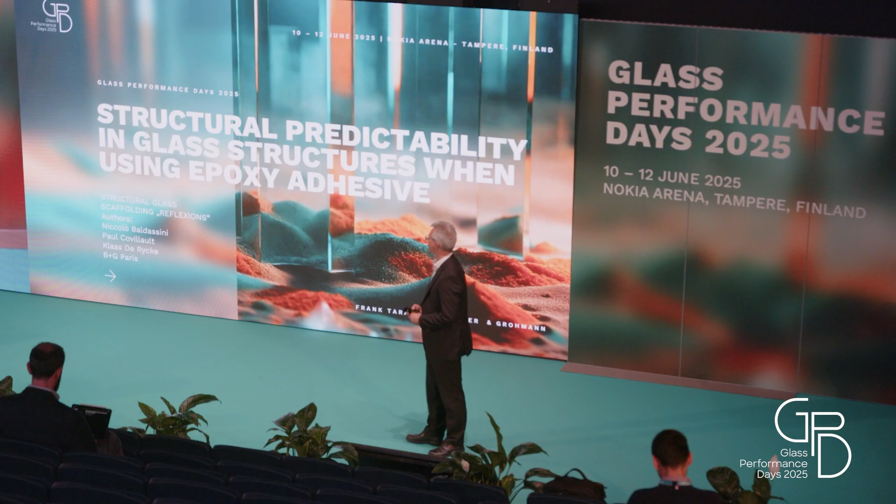And the authors of the paper are my Paris colleagues, Nicolo, Paul, and Klaas. And unfortunately, or fortunately, I must say, they cannot be here, but asked me to present the project to you. So it's my first time being here at GPD, and I've never been on such a huge stage, so we'll see how it works. There are a lot of empty spaces yet, but I'll do my best.

So here it is in all its beauty. We have been asked by an artist, Emmanuel Barrois, who came up with the idea to do a scaffolding with glass elements. And the idea is that it's a modular system that can be put together, dismantled, put together again at a different place, and obviously it's a piece of art.

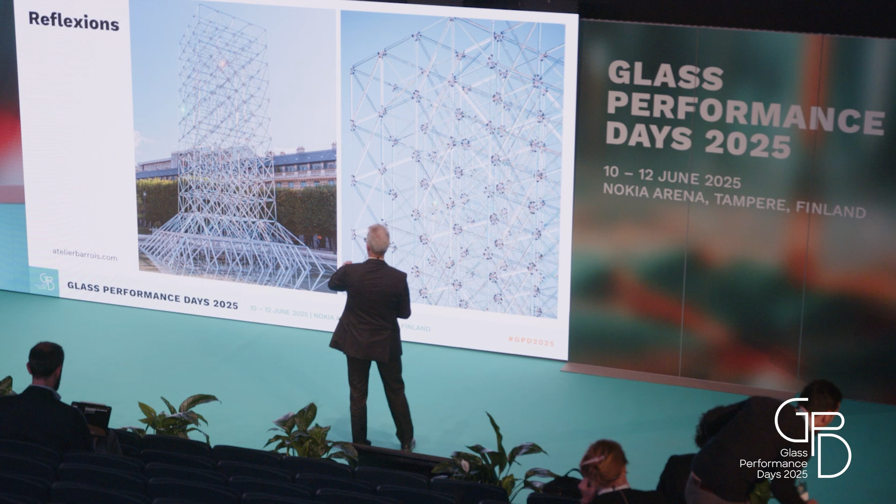It's not a structural scaffolding, but it's a nice study on how to solve the different problems that are involved with the detailing, and also on a global level, how to deal with the predictability and also with the brittleness of glass. So in these first two impressions, you see at the bottom there's a steel base, and up from there it's all glass.

And there were many studies done on the layout, on the configurations of the diagonals, maybe have some fancy shape, but the decision was taken, okay, we should stay very clearly in a pattern that everybody is familiar with in a scaffolding. And so there were also a lot of studies done on how to do the diagonals, in which configuration. And we ended up with this chevron shape.

So if you're familiar with structural engineering, you would say, okay, why are there so many? We could only have one diagonal in every plane and every level. That would be sufficient. But of course, then the artist said, that's a little bit too little, we need more. We need more diagonal bars. And that's where the dilemma starts.

Having more than one diagonal in every level means that it's structurally indeterminate. So it's sensitive to movements. You never know, okay, where does the force go? How big is the force in the individual member? So that's the key thing that we had to obey here, how to do this project.

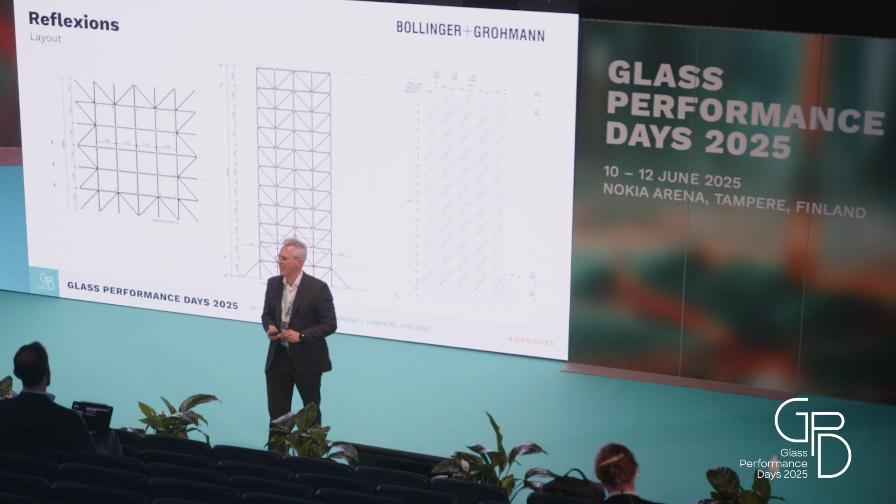What you'll also see, there are no diagonals in plan view. There's no spatial diagonals in these cubes. The cubes, by the way, are based on a 115 by 115 grid. So the whole thing is 460 by 460 in this upper part, and then spreading out to 6.90 meters at the bottom. Overall, the glass part is 12.65 meters high, which is supposedly the biggest glass scaffolding structure ever built.

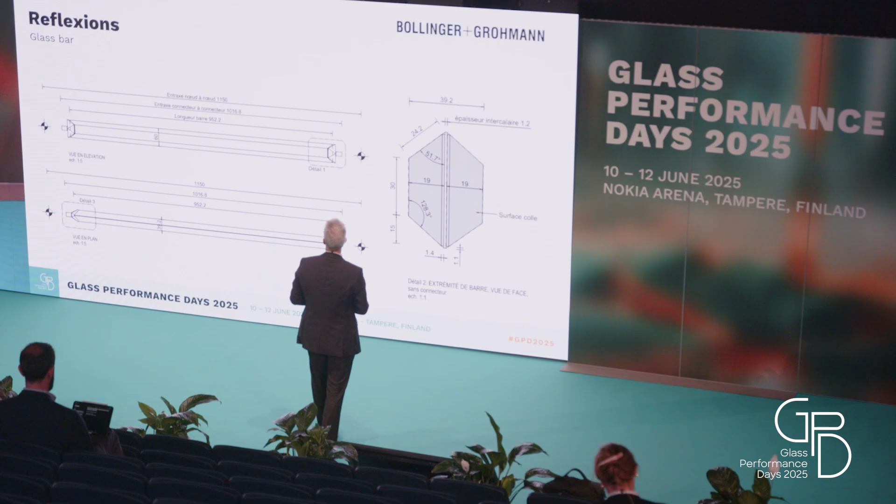So this is the bar itself, based on the 115 module, and it's comprised of two layers of 19 millimeter annealed glass. Except for some bars, they consist of toughened glass. The long diagonals at the bottom, and some with the highest forces of the verticals at the bottom are also toughened. And it's laminated with EVA. And of course, the end connection is the part where the gluing takes place.

So a lot of conceptual studies were done on how to do the nodes. And I've seen a lot of them. I only picked 4 out of these conceptual studies. The boldest one on the top, that would have been quite a challenge in my opinion, because this was considered to be all glass. So what you see there was considered to do this in glass as well, and bolt it somehow together, or glue. You can see that picture with the glue. So that would have been quite a challenge, and it was abandoned.

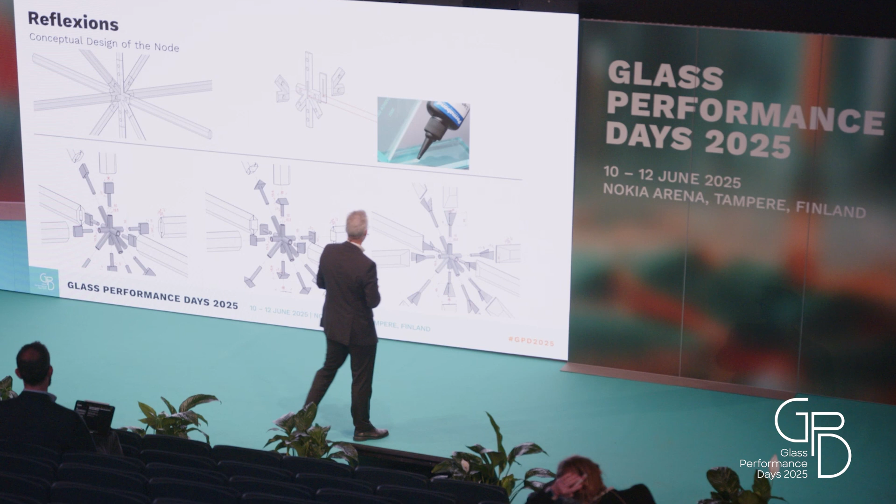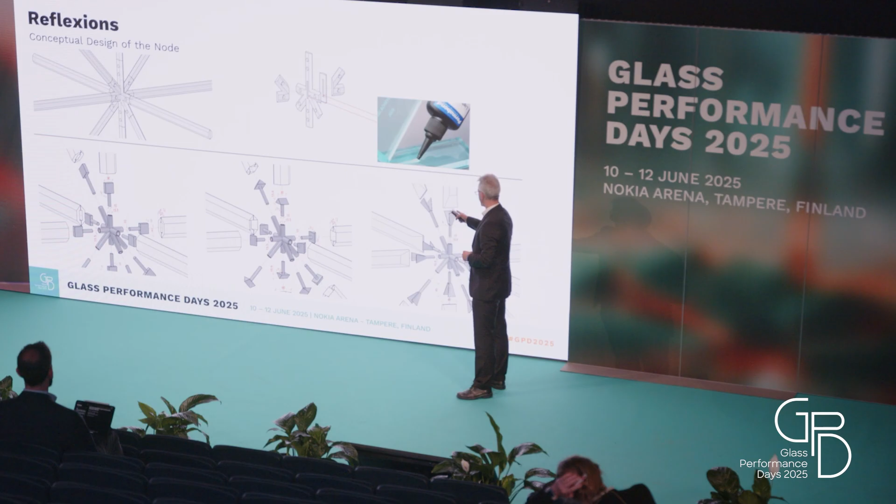And then we stayed a little bit more conventional. At the bottom, you can see the three different configurations on how to do the interface between the node and the actual glass prism. And we ended up with something similar to that. That's a pre-study still, but with a glued connection of this adapter to the end of the glass.

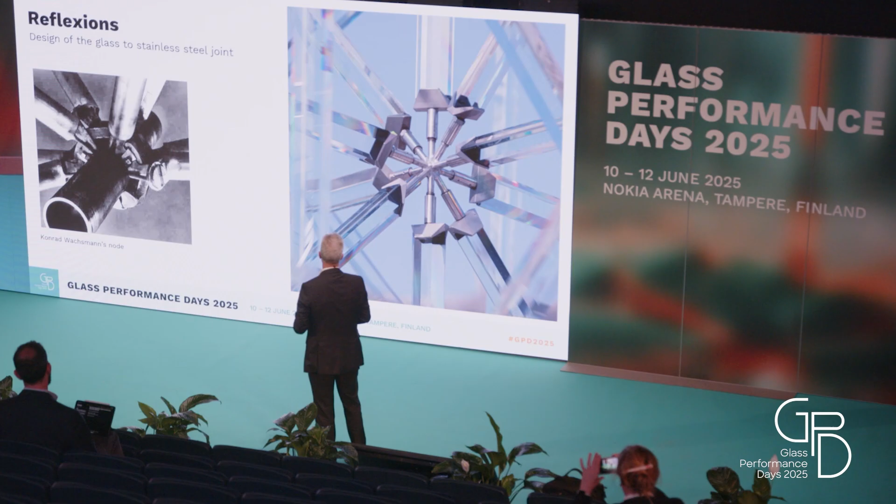And so this resembles somehow what you're all familiar with, this Wachsmann node or the Mero system where you bring all the bars together. The difference is that we don't have this ball and you cannot screw whatever configuration into it, but it's all predefined due to the geometry and the location in the system. And on the right-hand picture, you can already see the stainless steel interface, this adapter, and the sleeve with the thread, and this laser welded node.

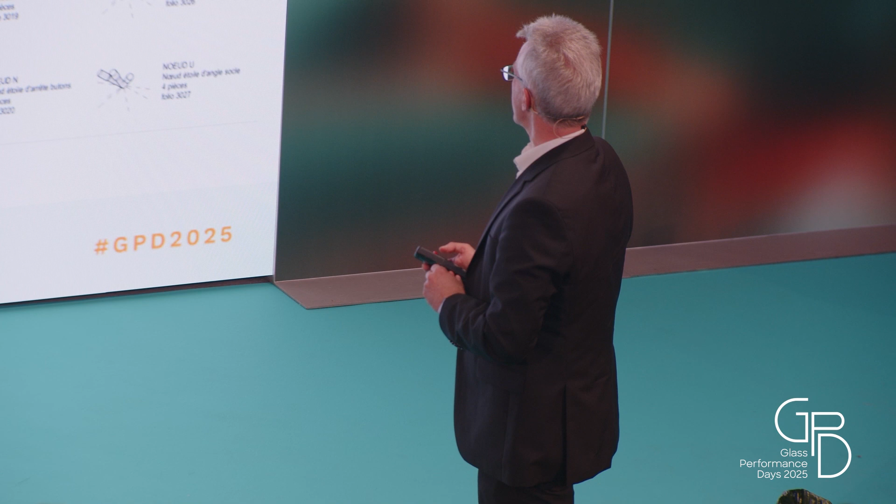So a little bit more in detail, on the right-hand side, you can see all the different configurations in these different colors that we had to provide. There's a M14 thread, there's the sleeve, and there's the counterpart on the node. As I said, laser welded. The shape of the angle, that was determined, by the way, by Emmanuel Barrois, the practice. They did all the glass assembly, they did also the lamination and also the gluing in their own shop.

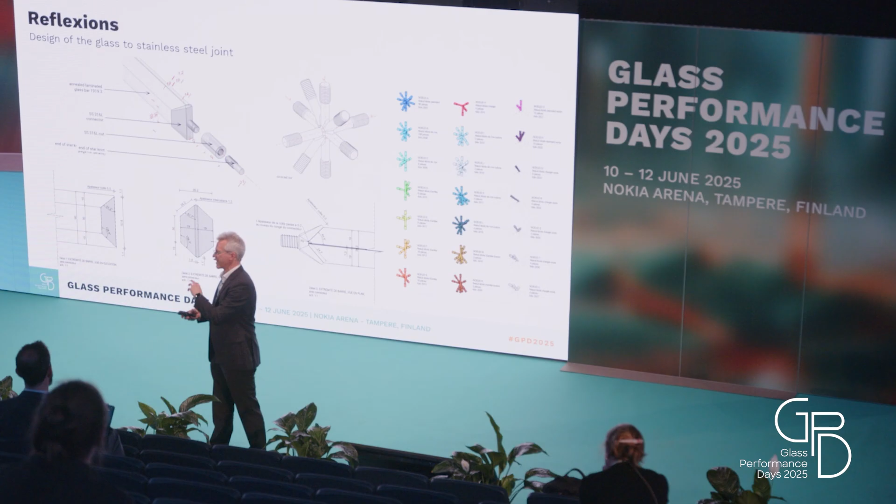And in the beginning, it was considered that we only have a 0.3 millimeter gap for the epoxy. Later on, that was changed to 0.6 millimeters due to the tolerances that are there. So 0.3 is really tiny. And there's one special thing: all of the threads in the horizontal and vertical bars are right-handed and right-handed. There's no left and right-hand thread. Only the diagonals have left hand, but only on one end, and the right hand on the other end. I'll get back to that later.

So of course, we had to do all the structural analysis, come up with the relevant loading, which is obviously wind loading, because there's no people climbing it, hopefully. By the way, it is placed in a water basin, so that prevents, hopefully, people from climbing. And what you can see here at the bottom, again, in this different color, that's the steel part, and above it's the glass part.

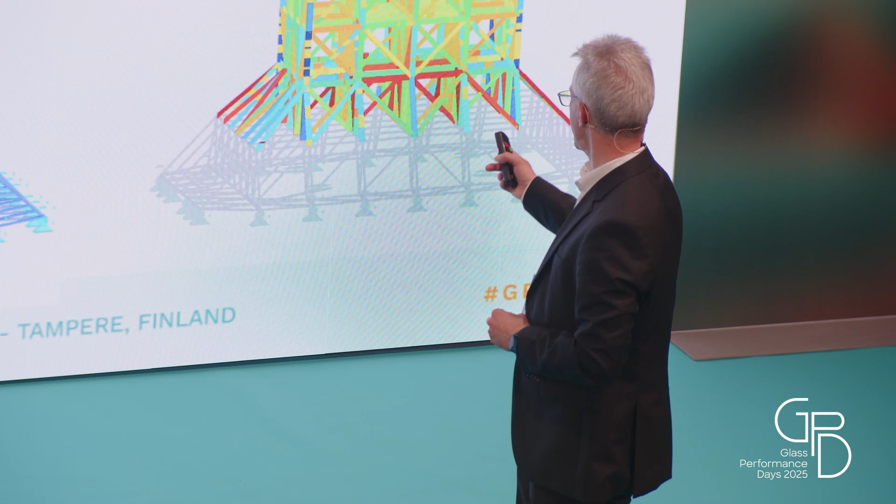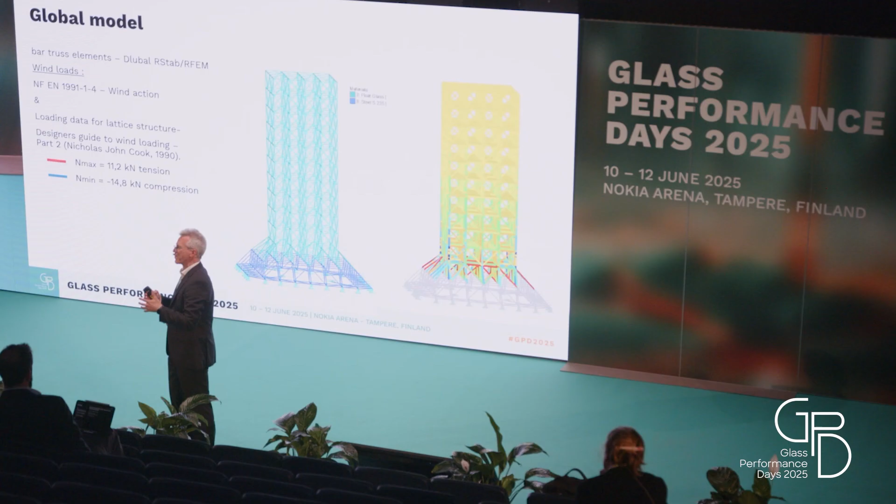And so the loading was derived by code, and also by what Nicolo refers to as the cookbook. So you don't get a meal from it, but it's from Mr. Cook. And so at the end, you have about 11.2 kilonewtons of tension in the red areas and approximately 15 kilonewtons compression maximum. And we took into account a little bit of the shading of the different levels of the truss. So it's a bit tricky to be sure, okay, on the load side, are you really safe or not? Is it really exactly what you're expecting?

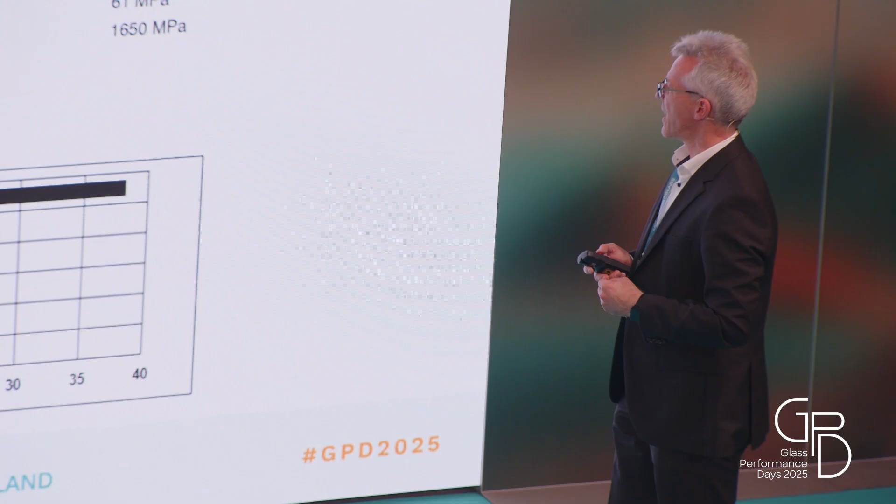And then we went on to the design of the glass stainless steel joint and how to glue it. And the choice was pretty soon taken to use an epoxy, quite a high strength epoxy and rather stiff. And down at the bottom, you can see the standard values that they are giving for average lap shear connections with metals. We didn't have any numbers for glass to stainless steel, but we believed it should be somewhere in the range of this 20 to 25, 30 Newton per square millimeter.

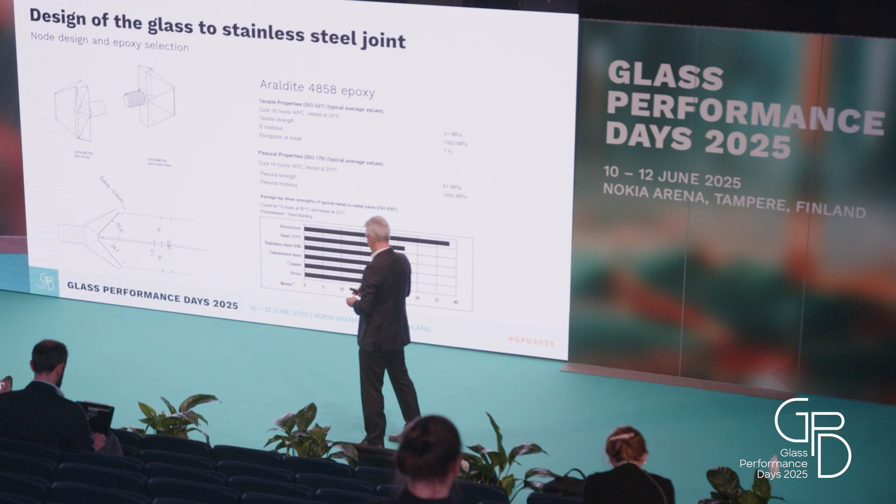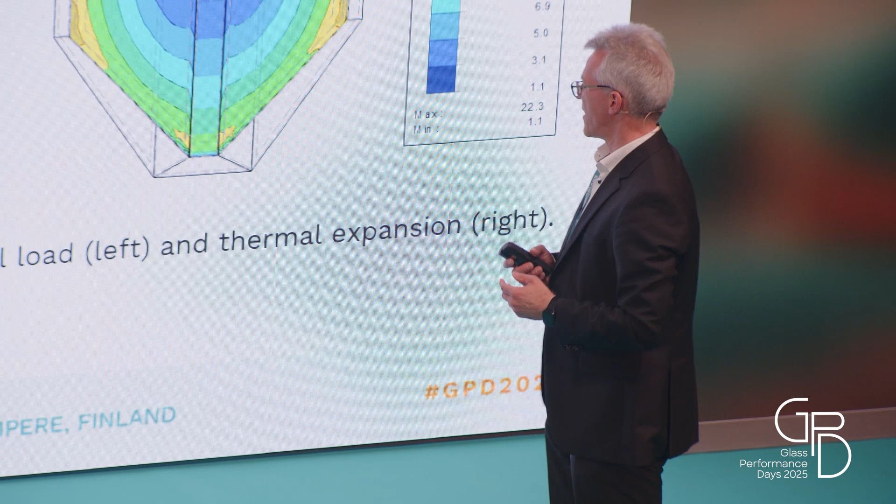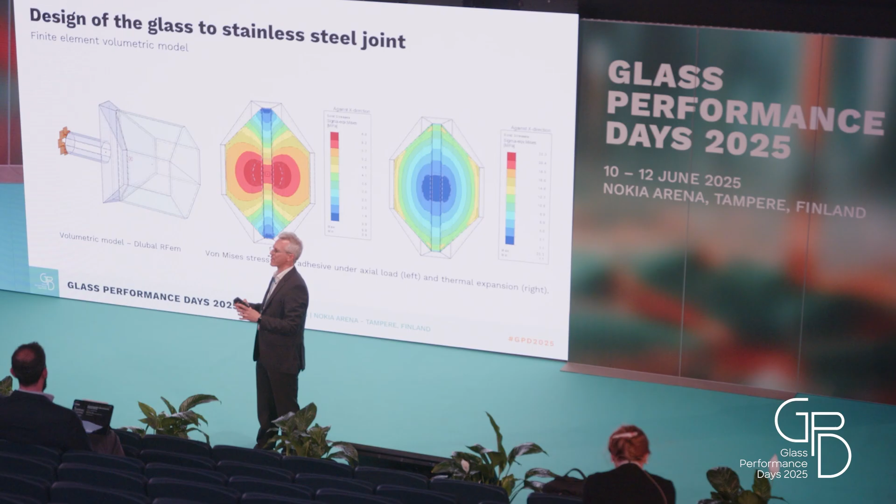And then we did some calculations with a finite element analysis. As you can see, the one on the left, that's for axial loading. So there's a concentration in the center with the bigger stress there. And of course, that's due to the stiffness of the whole node. And then we also looked at what happens if there's a temperature load on it. And it's quite obvious the stresses are small in the center because that doesn't move, and towards the edge the stresses will be higher. So that's quite favorable because the areas with the maximum stress are not at the same points. So that's quite good for us.

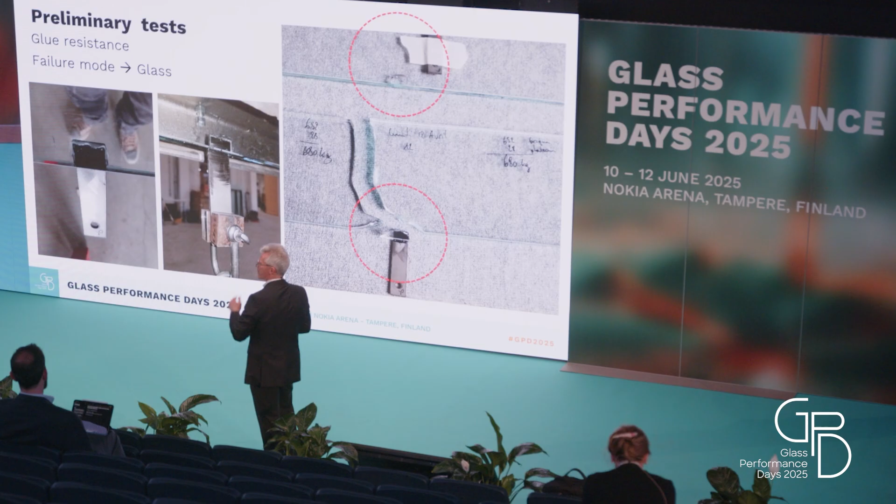However, with this kind of structure, we don't really rely on these calculations. We did a lot of testing. And the preliminary test was about the adhesive itself. And it turned out that always the glass broke. It never failed in the adhesion.

And of course, the next calculation is, we have to come up with a number for how much the capacity in tension and compression is. And for the tension capacity, we came up with 35 kilonewtons. But that was only for the glass itself. It didn't take into account this complex geometry.

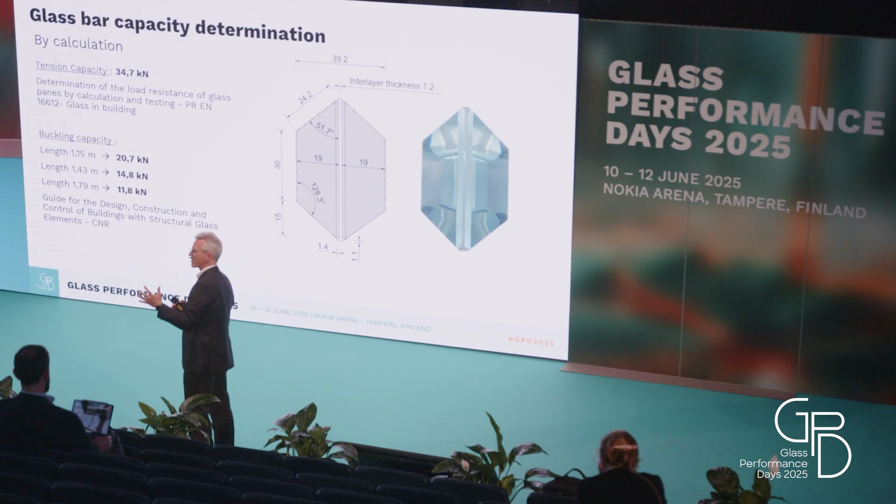And for compression, the buckling capacity, you can see the numbers there. For the middle length, the standard diagonal, it's about 15 kilonewtons, according to two different codes that we took into account. And also for the shear stiffness of the interlayer, 5 seconds and 25 degrees were taken into account for the shear value of the interlayer, because it's due to wind, so it's a short load and not a permanent load.

So then we went on to do a lot of buckling tests, just to make sure, or to find out how good is it, and our calculation. And we came up with a much higher number. It's around 50 kilonewtons NRD.

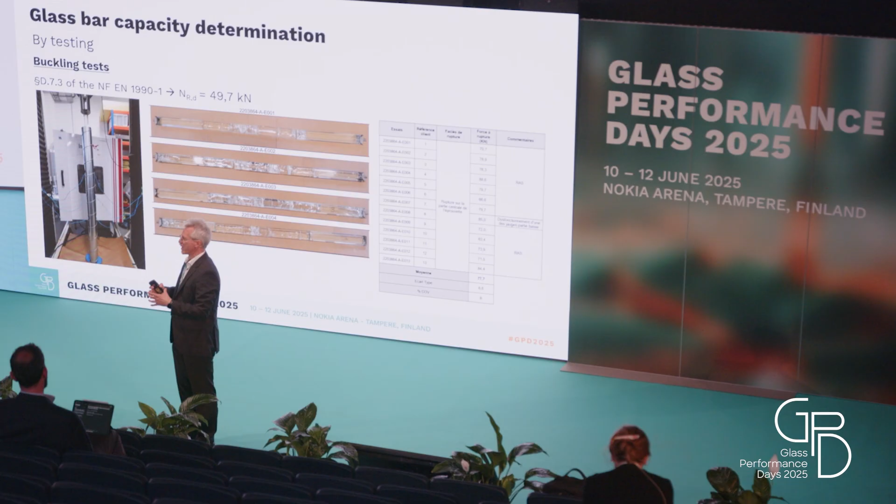On the left and right side, you can see the configuration. Unfortunately, they put a pipe around it for safety reasons. I would have loved to have an acrylic pipe to see what's going on. So only afterwards you can see the pattern, the fracture pattern. And so the results were very promising.

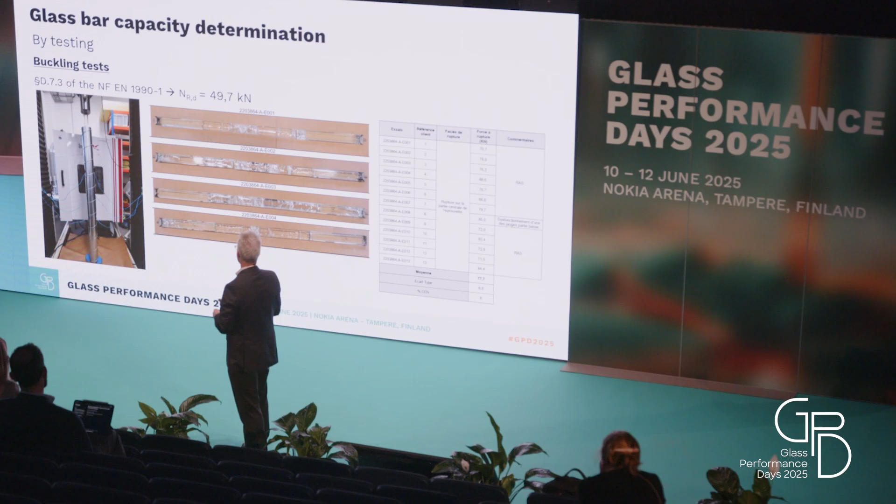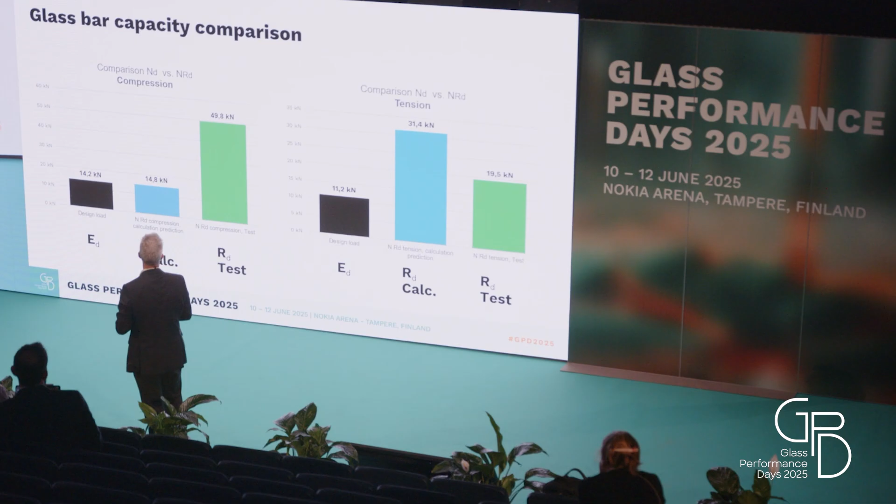We did the same for the tension. And if you have in mind what I said before, the number, there's quite a difference. The tension results were quite lower. Here in this comparison, you can tell, okay, for buckling, we were much better in the test. Tension, much lower, but still way above design load.

Comparing the buckling over here, that's really close, 14.2 to 14.8. You might feel a bit uneasy, but the test showed it was much better. And the reason for it, in our opinion, being that this buckling is a very short term loading in the test, and also we went all the way even after cracks occurred.

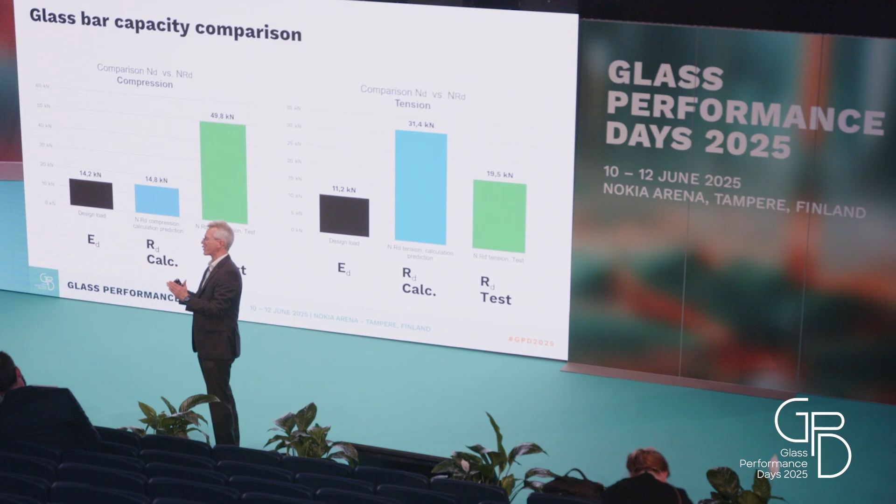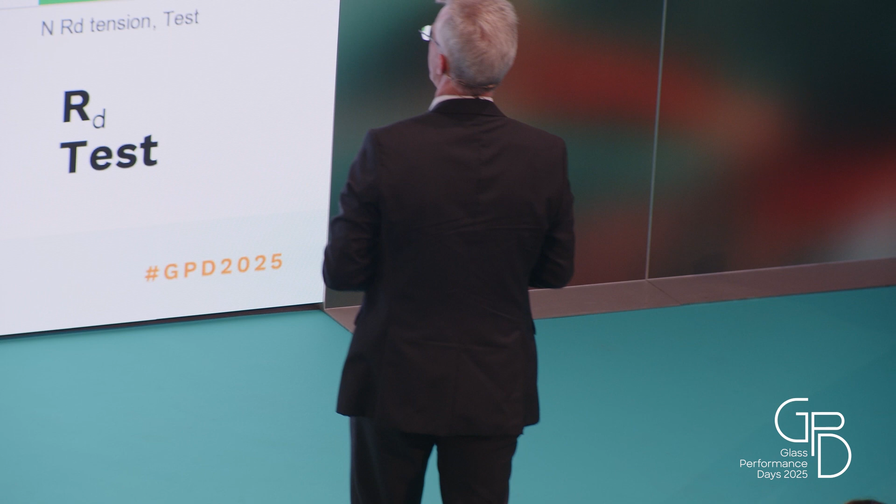But the calculation, the limit is there's one crack in it. And then as soon as you reach the tension limit, that's it. So that's how we think this big deviation occurs. And here, as I said, this was only the bar itself, the glass, and it didn't take into account all the complexity of the connection.

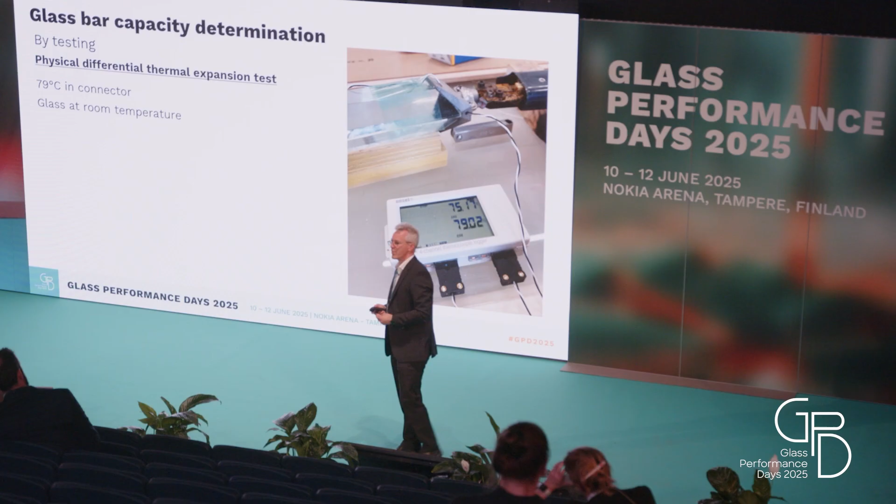Then we also did the same for the temperature. We put this heat cutting knife to it and raised the temperature to 80 degrees, and nothing happened at all. There were no cracks, nothing in this location. The glass itself was at room temperature.

So predictability, I have to go through that very quickly because we are already almost short of time. So our key goal on the one hand side, if you know exactly what force is in the member, that would be nice. But since it's hyperstatic, that's an issue. As I said, you cannot really predict exactly what load is in which member.

Taking into account there are tolerances, there might be some slippage. And that's also a reason why we finally decided to do the connection in a longitudinal way. Don't do any bolts with some play in it. That would be very unpredictable what's happening. If you have it longitudinal with the threads, there's not going to be a lot of play in the connection.

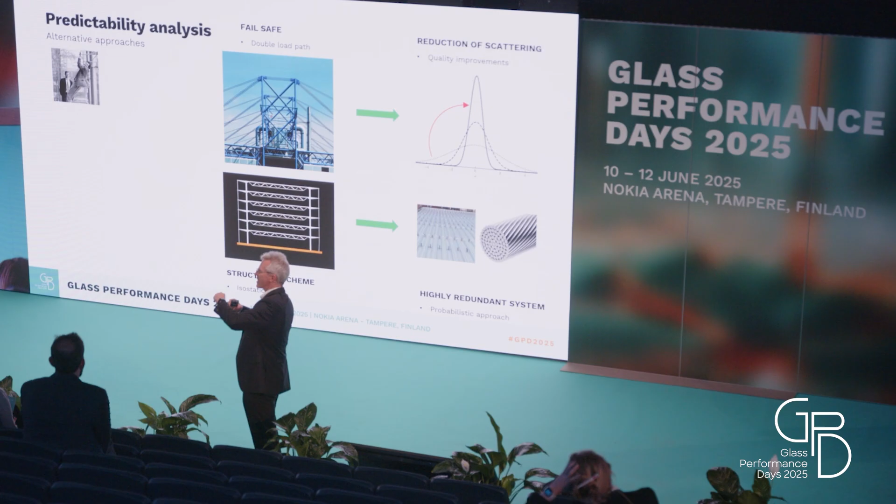And so the key thing in our opinion in this case was we have to reduce the scattering to a very minimum to make sure the production is really high quality. We don't have any large deviations in the member length, so we don't cram a member into a position and have some inherent forces. That was our key goal.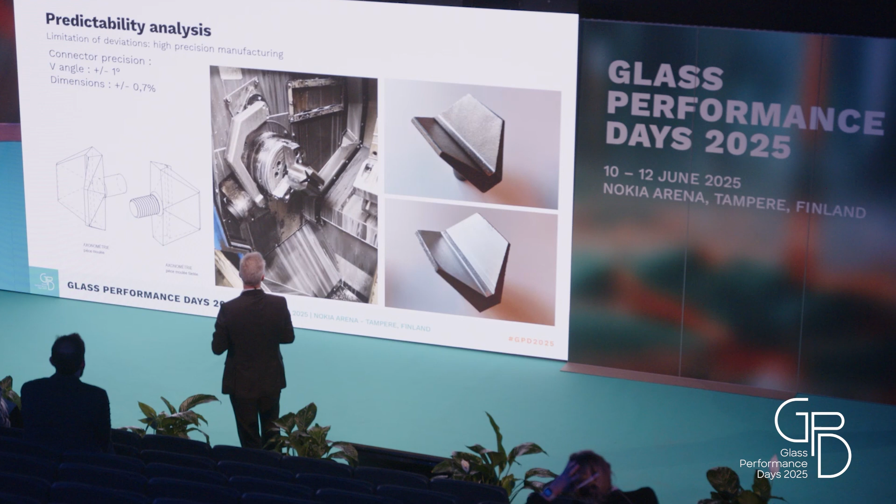And also for the gluing, we used micro shims, really tiny. I don't know whether you can see that. Yeah, you might. There are these little dots here. So that ensured that the thickness of the epoxy was as it was designed and not totally different.

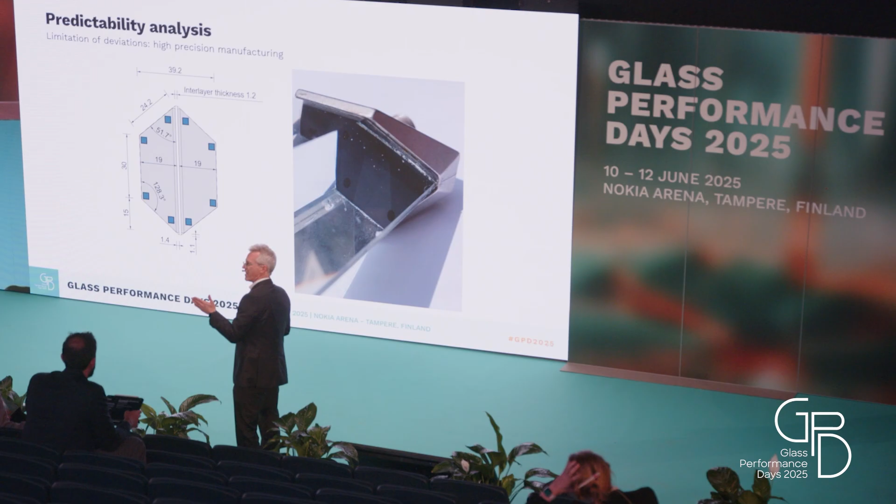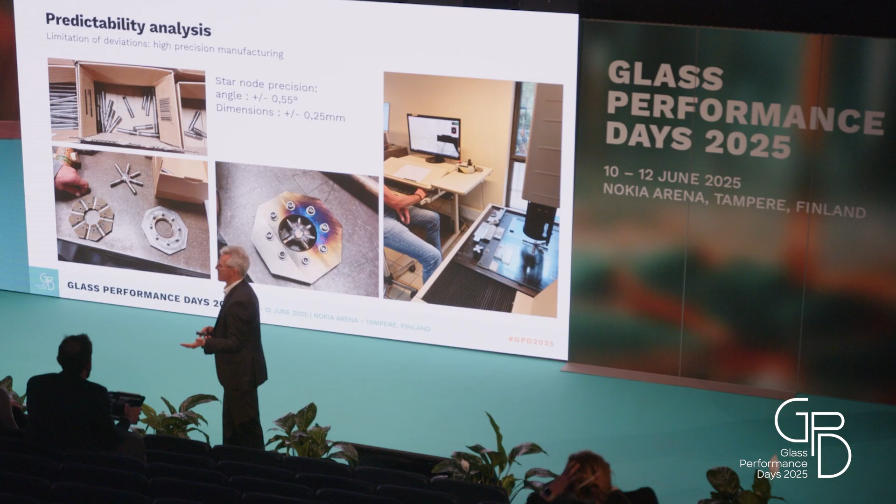Then we used jigs for the laser welding of the nodes, and all of the nodes were then 3D scanned afterwards, and those that didn't meet the requirements had to be replaced. So that's very tricky with these configurations, and it was also decided it makes absolute sense to do a mock-up and try before going for the full size. It's real size, but only a little part of it.

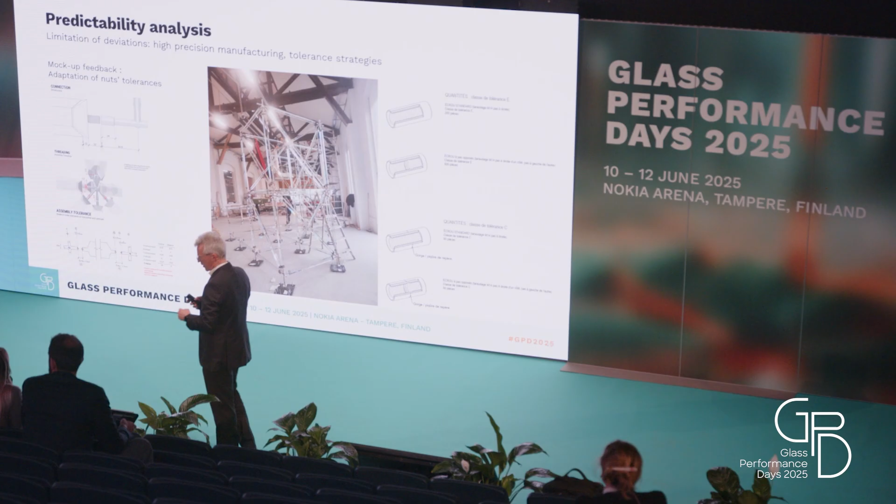And there were also elaborate studies on tolerances and how to accommodate them, and how big they are and how big they could be. And during the mock-up construction, it turned out, okay, it's very hard to align two threads exactly in one line without any angle deviation.

And so we had to come up with a different set of sleeves with a little bit more tolerance in the thread. And so that was like a backup. And so when it's hard to turn, they could change the sleeve to another one that has a little bit of play in the thread. So that worked out fine in the end.

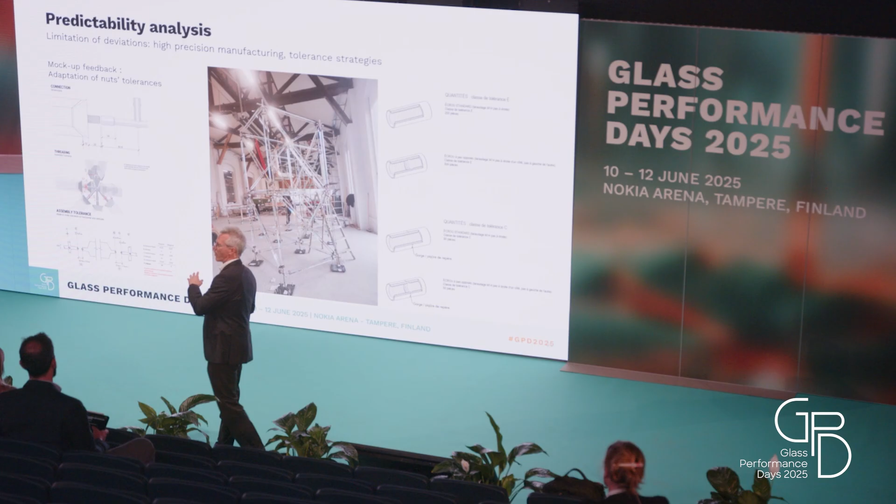Overall, it's about 1,200 bars, I forgot to say, in the whole thing. So there's a little video. Can I start it? I hope so. Of the assembly. So there's a jig, that bar that you can see behind. Then the sleeve in the beginning is all the way at the end. You thread it back a bit.

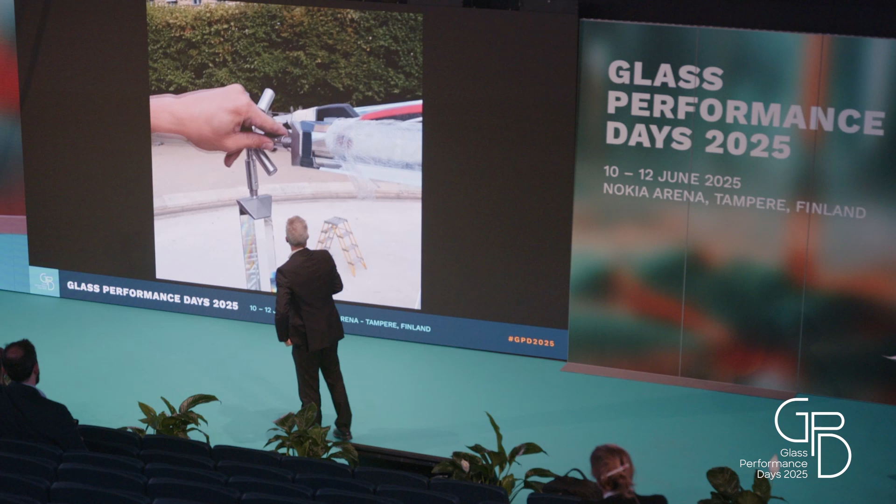And then on the other hand, you'll see there's a 2 millimeter gap to the node. And then, of course, it's a bit tricky because you have to make the threads meet one another in the right angle. So you see now he's turning it, and then the distance or the location is checked with a laser. You will see right away. And by pushing it a little bit, you can adjust it by 1 to 2 millimeters in the end.

And on one end, the sleeve is turned all the way against the adapter to block it. If you look closely, you can see these little holes. There were grub screws that were intended in the beginning, but it turned out that we don't need them. And also the workers would go crazy because they're so small, they would drop them all the time. And so for this temporary structure, it was decided that this is fine.

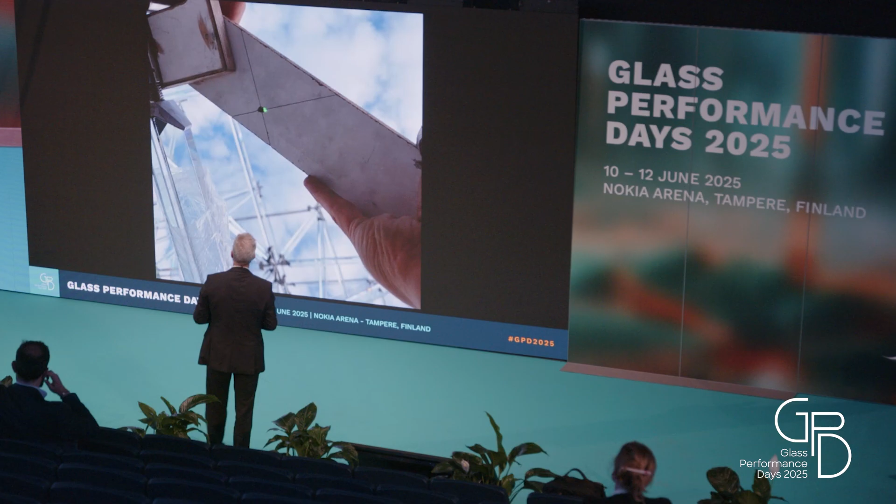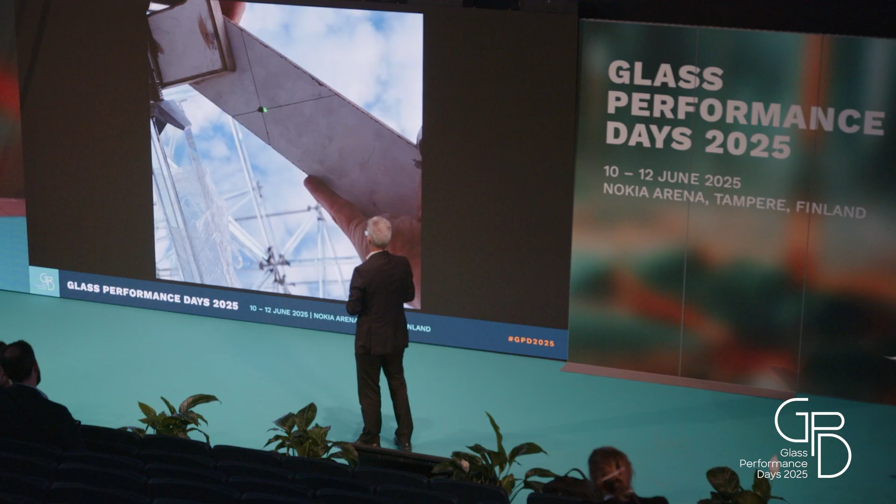So here you can see it's perfectly aligned in the one direction already, and the other direction can be adjusted in the next step perpendicular to it. So discussion. It turned out that we were able to install the 1,200 bars within 2 weeks, so that was pretty quick. And the guys installing it didn't have any experience with glass. They're just scaffolding people. And of course, you had to figure out how to do it without blocking yourself and not touching the glass.

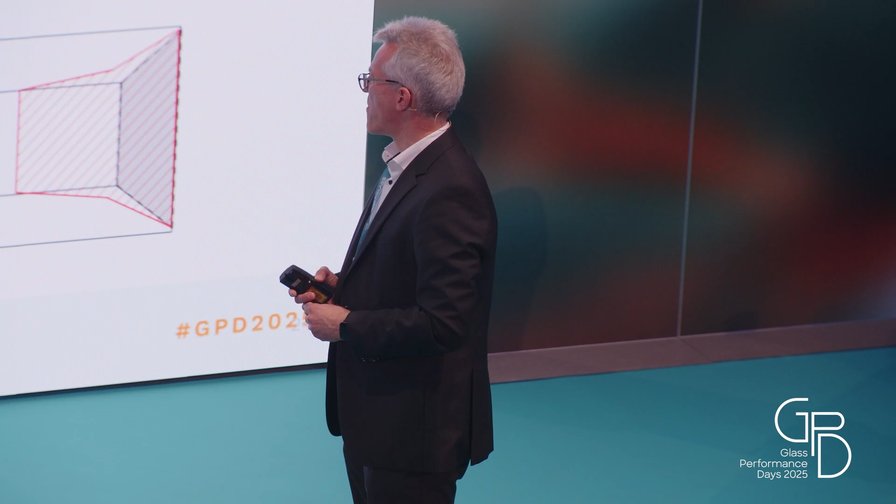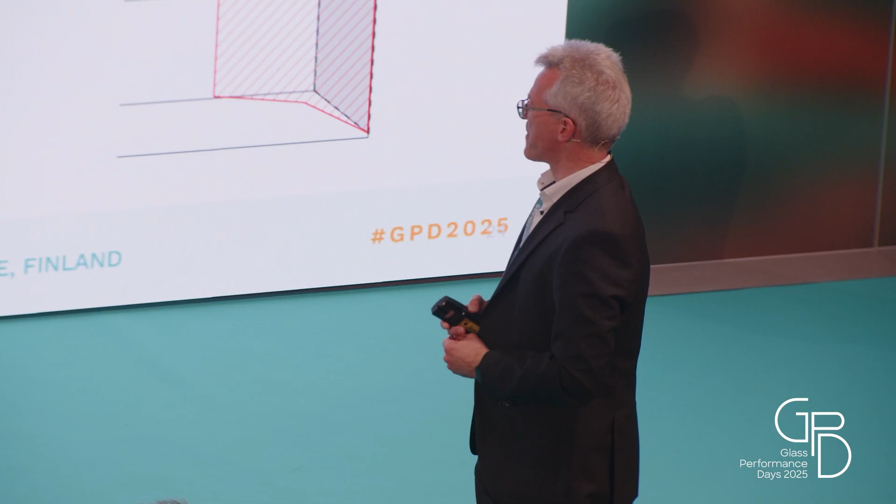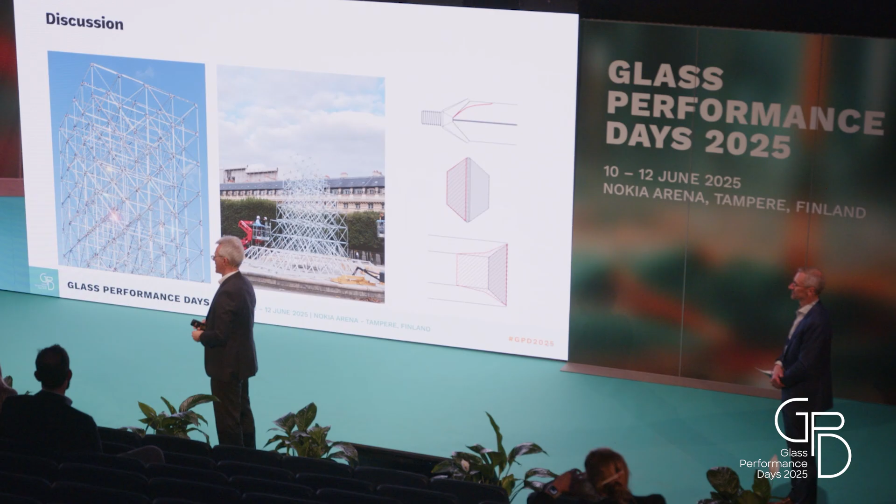And finally, it was there in the Palais Royal Gardens for 2 months. It underwent a medium storm as well. So after they dismantled it, we found a couple of bars that had cracks. And all of the cracks were in that fashion, but they were not in any specific location. We couldn't say, okay, this is the most loaded part. They would be on the south, on the north, at the top, some at the bottom. I don't know exactly how many cracks there were.

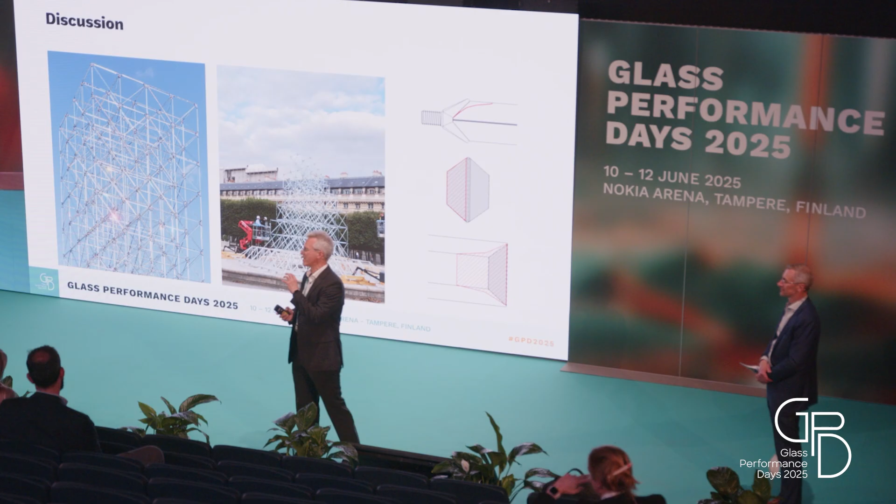But now we can discuss, is this a failure? Is it a success or not? I think it proved the system works. We have the redundancy on a local scale because we have this laminated bar. And also in a global scale because we have these redundant diagonals in the system, redundant bars.

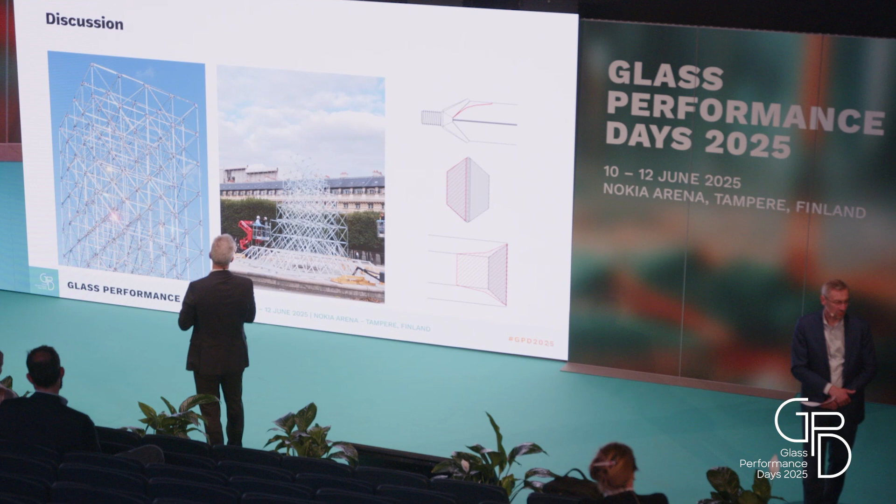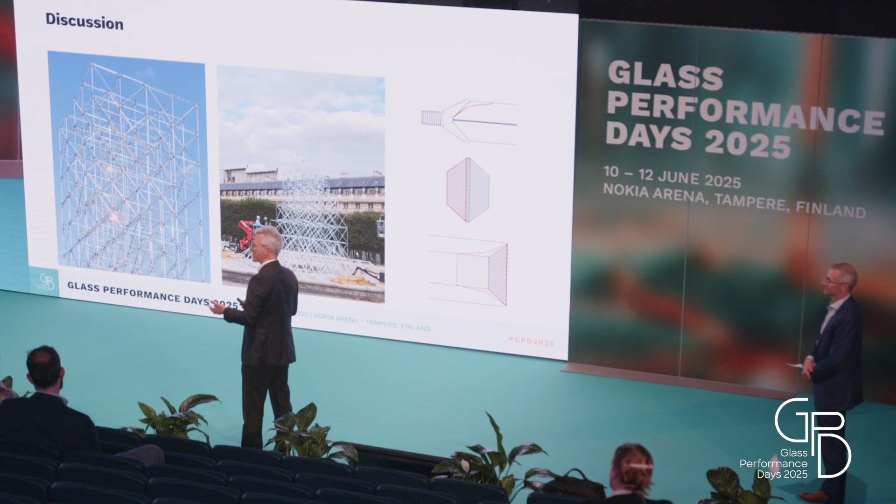And I think there is some room for further research because discussion was going on. What's the reason? I think this is quite a forensic thing to do, to find out what it is. Was it during mounting? Was it during the loading? Was it handling? Was it the preparation of the glass? What caused this? And to end my presentation, I just wanted to show you some more of these very nice pictures taken by Niccolo Baldassini of our office.

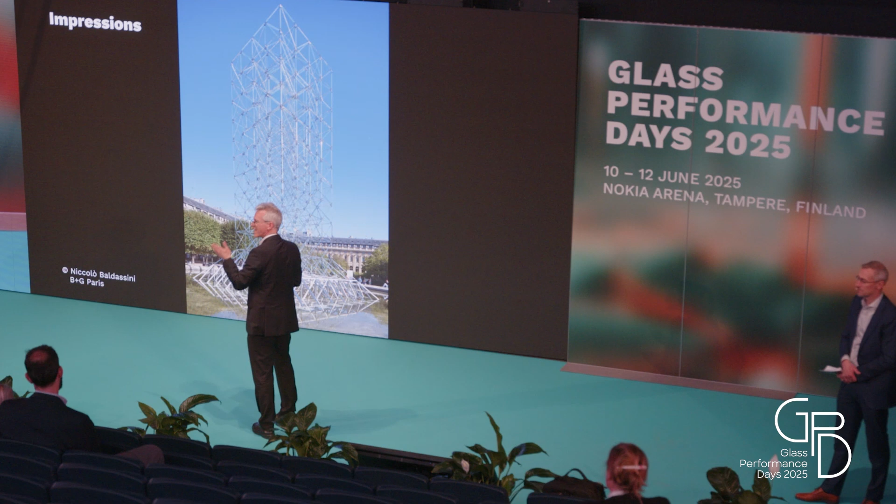It is very fragile. And on the other hand, that's also something interesting, because due to how we mounted it, we couldn't put all the bars in a certain rotation. And the artist was fine with that because this also creates diversity in the structure. If all the sunlight is parallel and everything is in the exact same rotation, it would be quite boring in our opinion. So if they are twisted a little bit, you have a bit more play in the reflections.

And also looking at it from different angles, sometimes it's really calm. And if you turn a little bit, it gets quite chaotic. You have a lot of bars. There's never an X. This is due to the fact that the diagonals are switching direction in the different planes.

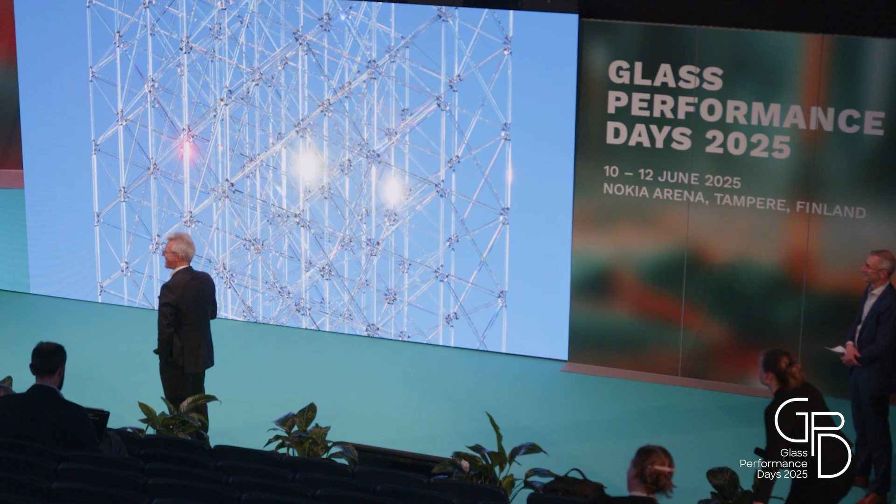So it was there for 2 months, and it was meant to be redone in Rome after it was dismantled. That was cancelled. But next year it's supposed to be built again in Paris, and after that it's supposed to be re-erected in Japan, which might be another interesting issue, hopefully it doesn't get an earthquake during that time. But that would be the next level of testing it in real scale.